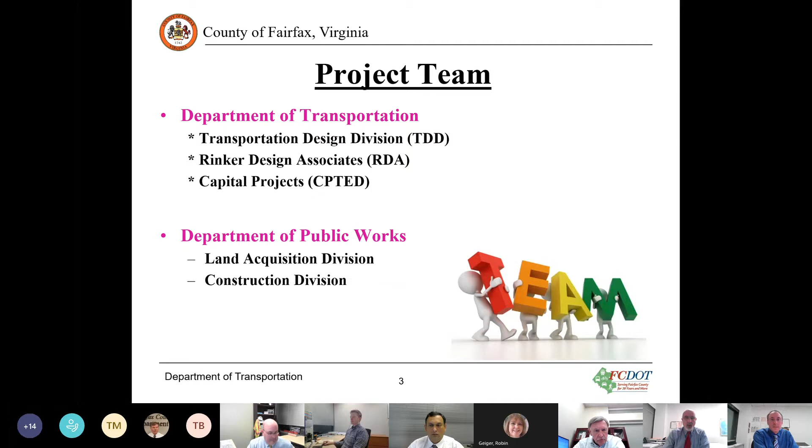So this is our project. We're planning to install a 5-foot wide concrete sidewalk on the south side of Chesterbrook Road between Maddux Lane in the west and 41st Street in the east. Our goal with this project is to fill in missing links in the walkway network so we can provide better neighborhood connectivity within the project limits.

One of the things that we'll also do is address any ADA issues within the project limits and other issues that we encounter, such as drainage issues, and there are plenty of those along Chesterbrook Road. We're going to be putting in curb and gutter, and also a closed system, so that means there'll be a drainage pipe under the ground to collect storm water and take it away from the roadway.

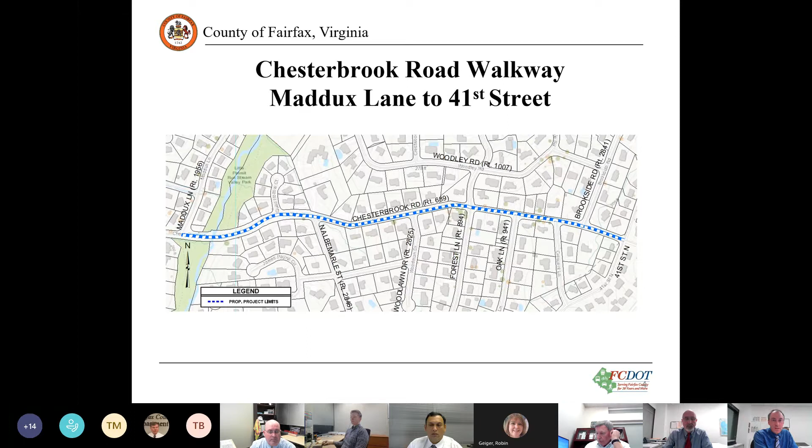As for our meeting tonight, we're coming to you at the very beginning of the project development process, so we have not progressed the design. It's good because we can take your feedback. We want your feedback so we can incorporate your ideas into the project. But on the other hand, we're probably not going to be able to answer some of your really detailed questions because we just haven't reached that level of the design yet. But we really need your feedback so we can keep the project moving forward in a manner that's consistent with the wishes of the community.

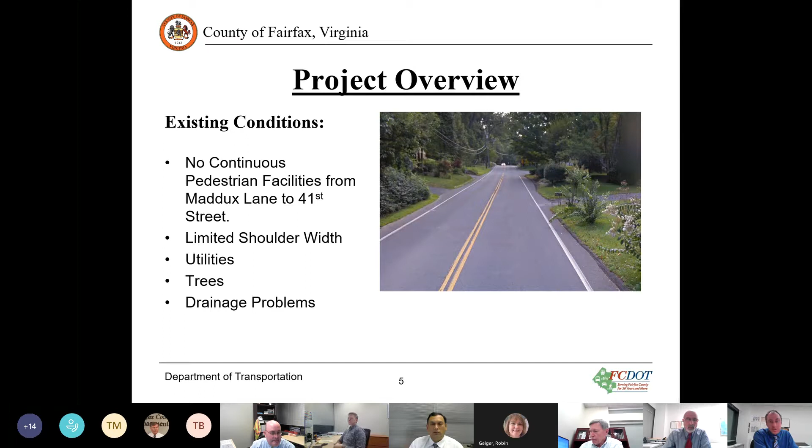So briefly, I just want to talk about the existing conditions out on Chesterbrook Road. As I mentioned, there's no continuous pedestrian facilities within our project limits. We have a very limited shoulder width. There's utilities, both aerial and underground, that are under the road and under the shoulder or just outside the roadway section that we're going to have to contend with. There's trees, bushes, miscellaneous landscaping up and down the project that's right up next to the road. And there's drainage problems that occur throughout the roadway in this area. All these are some of the more major issues that we're going to have to deal with as we move forward.

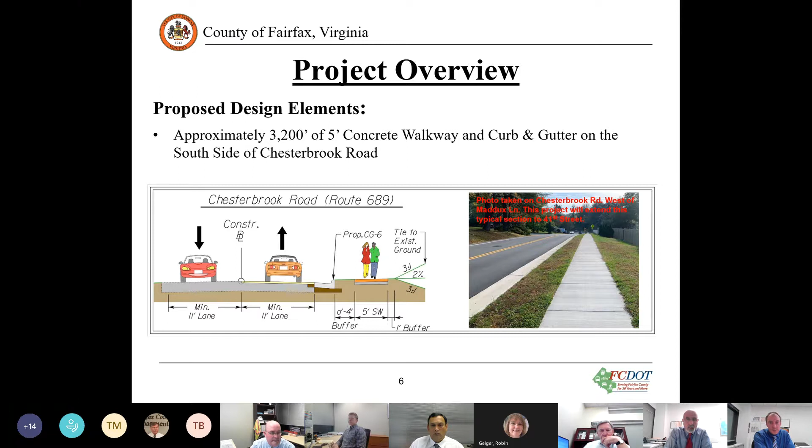This image on the right is an image of the Chesterbrook Road sidewalk project that we recently completed. This is a shot that's just west of Maddux Lane. Note the curb and gutter right up next to the travel lane, the grass strip, and then the concrete sidewalk behind the grass buffer. This is the same typical section that we would look to extend all the way to 41st.

One issue that people who live in this area are probably very familiar with is the flooding that occurs from time to time at the intersection of Chesterbrook and North Albemarle. The county actually has a separate project that we're going to do at this intersection to address stormwater issues. This project is being led by the Department of Public Works Stormwater Division. We're proposing to upgrade all the stormwater facilities at this intersection to address these flooding issues.

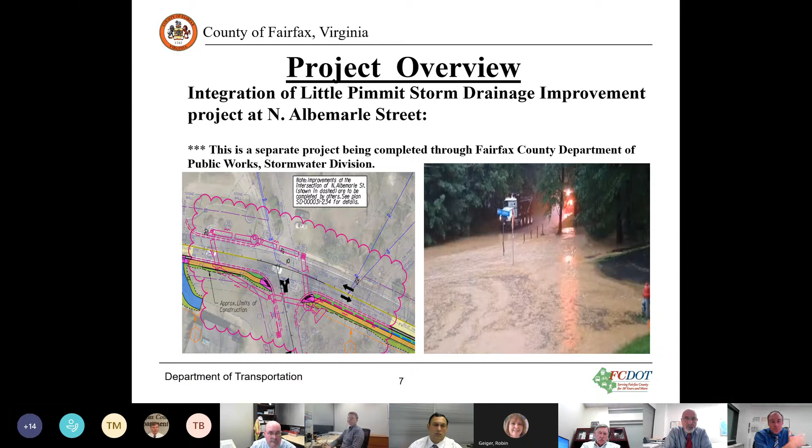Our project, the sidewalk walkway project that we're talking about tonight, is a separate project that's going to come in behind this. We're working together with that team. We're going to tie our storm drain system, our sidewalk and curb and gutter into the facilities that this other project puts in before we get out there. So I just want you to know that we are working on this issue, and it's something that our project teams are coordinating on.

We're going to use the concrete surface of the culvert as our walking surface. So rather than install a separate sidewalk over the top of the culvert, we're going to tie the sidewalk into the culvert, and then people would walk across the culvert to get to the sidewalk on the other side. So we would also not be extending the curb and gutter across the culvert. It would stop at each end.

So there'd be a small section, a 50 to 75-foot section where there's no curb. So what we would do is we would put in a tubular marker or something that would separate the travel lane from the top of the box culvert where people would walk. We would also put in a handrail on top of the culvert to keep people from falling into the stream.

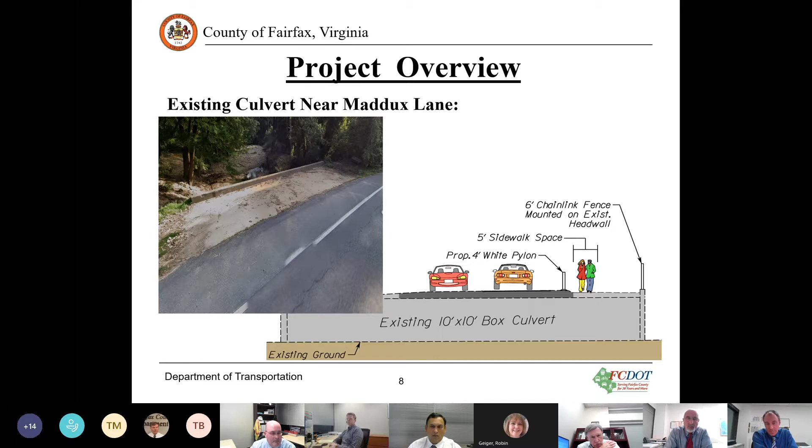The next area I wanted to talk about was another culvert on the east end of the project near 41st Street. We have a little bit different issue at this culvert. There's actually not enough room to put a sidewalk on top and maintain everything we need to maintain along the roadway. So in this case, we actually have to extend the culvert.

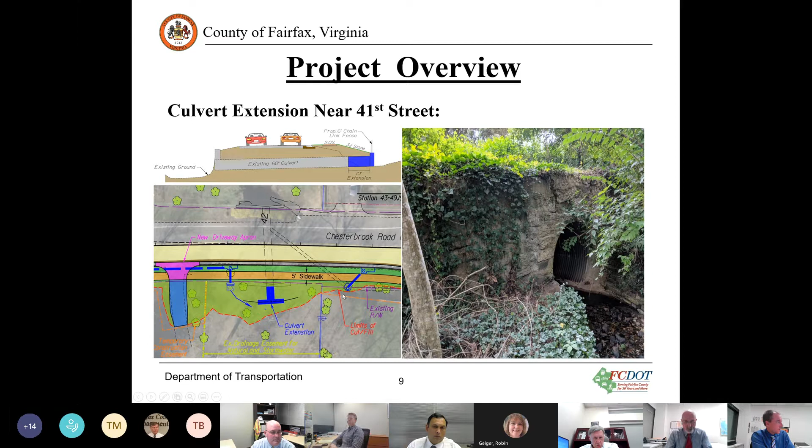So with that, I am going to turn it over to Adam to talk about the next issue for our project.

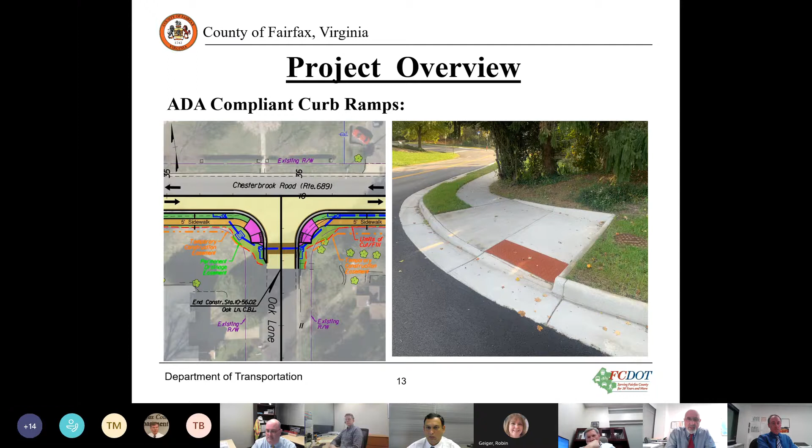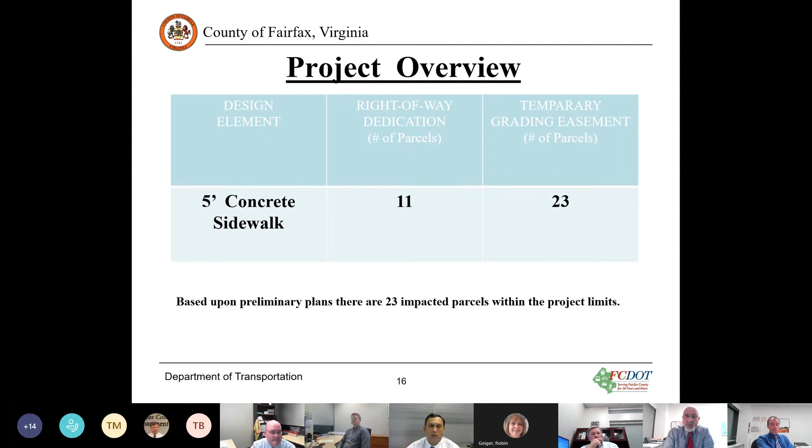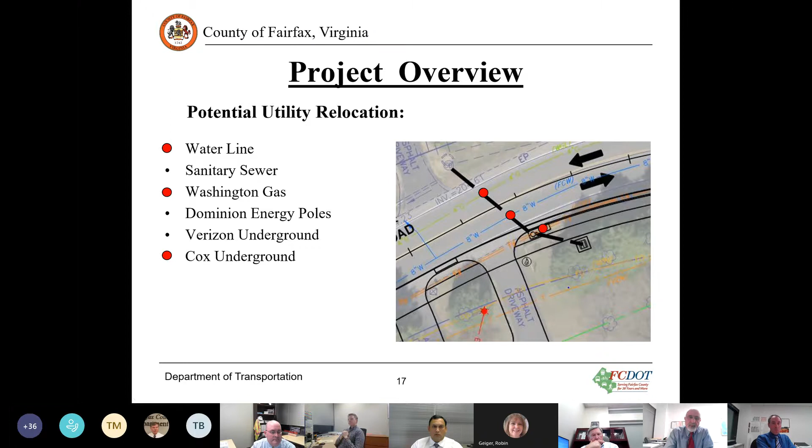After all the land acquisition is complete, we need to go to utility relocation, which is scheduled to be completed by September 2024. After that, construction will start in October 2024, and hopefully we finish construction in summer 2025.

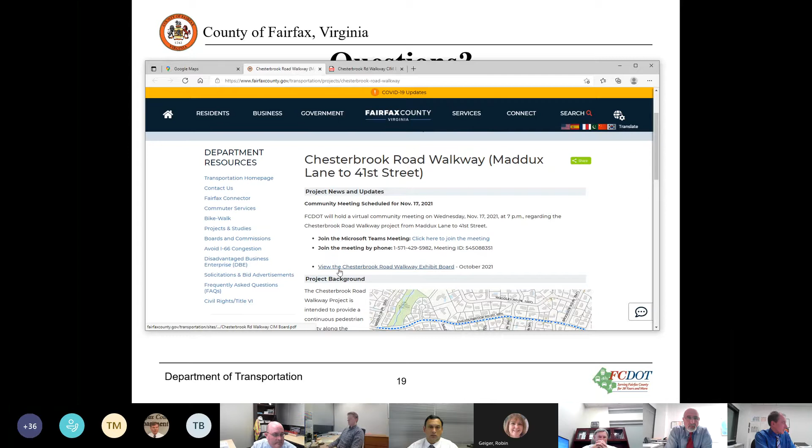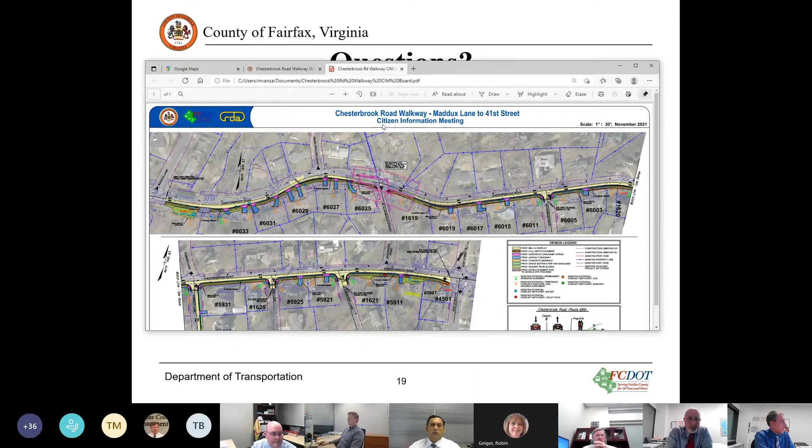Additionally, on the project website we're going to post the presentation from tonight. Also, there's an exhibit board on the website where you can see all the specific elements of our project, where the sidewalk would be across every property within the project limits as the design stands today.

We would like you to submit comments by December 10th, so that would allow us to move on with our project development process and get on to the next phase of the design.

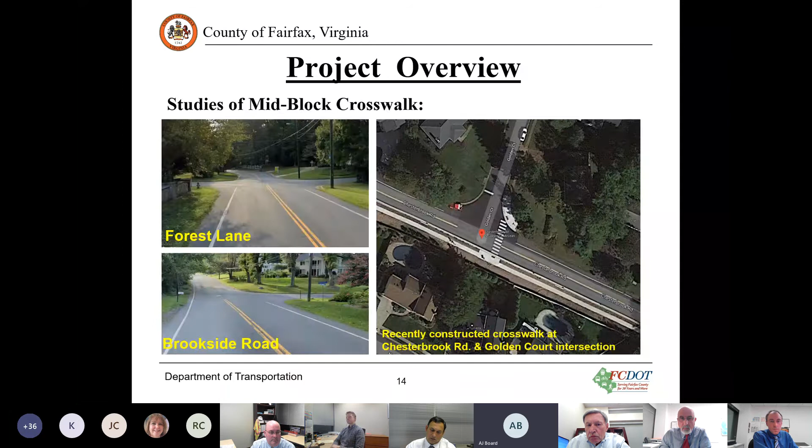Yeah, hi there. Actually, my first question about compensation for landscaping and tree removal was answered, but that sparked another question. If there's a right-of-way on your property, is that the piece you might have to acquire, or is it typically land beyond that easement right-of-way along Chesterbrook?

So I'm going to back up to a slide and talk more about this, and hopefully in the course of my answer I answer your question. This is an example from the exhibit posted on our webpage. The main element I want everyone to understand is the existing right-of-way line shown in purple here, which is the current extent of the property — that's the start of the public right-of-way.

So if some element of our project extends beyond that purple line, we then need to buy a little sliver of right-of-way for the project. If there's a drainage inlet, or if the sidewalk has to bubble out to go around a tree, say, then we would buy land beyond this purple line, and that land would become part of the public right-of-way. Now, there's another type of easement that Max spoke about briefly during his part of the presentation.

So there's permanent easements. Permanent easements are dedicated right-of-way, which is what I just described. And then there's also temporary easements that we could buy.

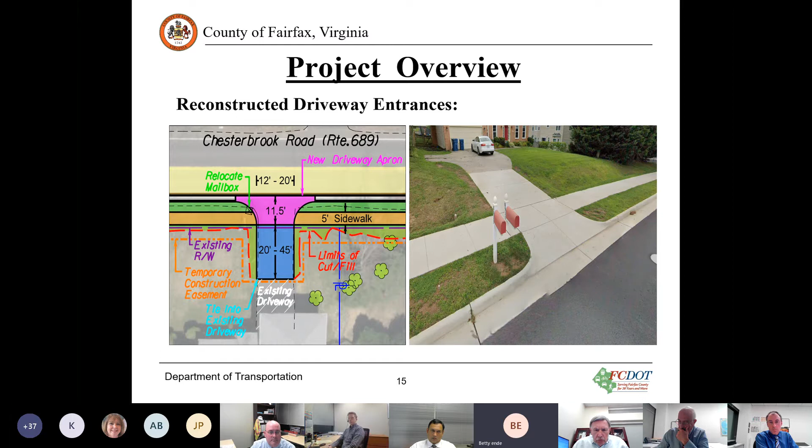My second question had to do with what you call extra pavement due to vehicle off-tracking. When you add the pavement, does that mean it gets added to the other side of the road, or is it on the same side as the sidewalk? Adam, do you want to take that question? All the improvements will be on the same side as the sidewalk. So the answer would be on the side of the improvements that we'll add with the sidewalk. We have no plans to propose anything on the other side of the roadway.

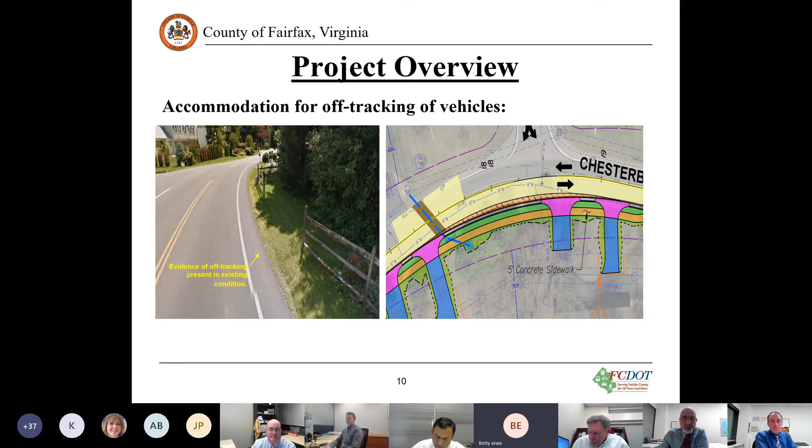We want to keep the project scope to the side of the sidewalk that we're constructing. I hope that answers your question. Yeah, okay, and then this probably gets the same answer, which is the curb and gutter that goes in is only going to be on the sidewalk side, correct? The other side just gets left alone. That is correct. Okay, thank you.